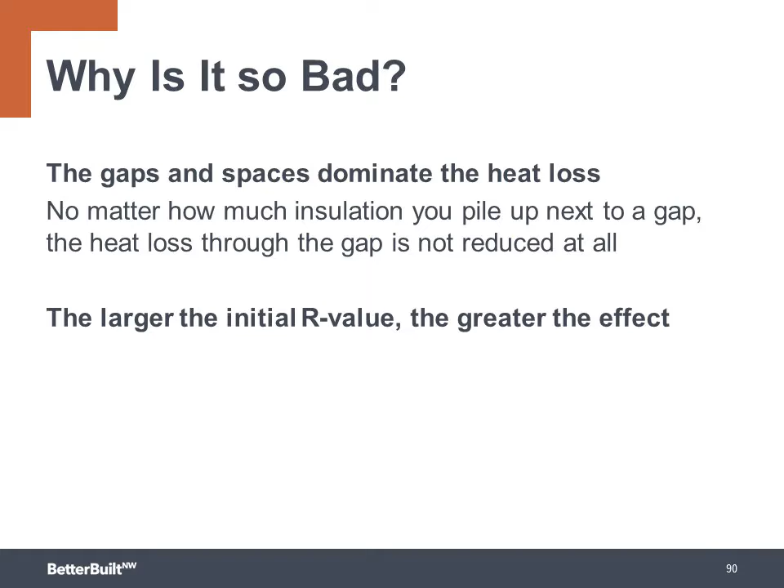So why are those imperfections in batt insulation so bad? Well, the gaps and spaces dominate the heat loss. No matter how much insulation you pile up next to a gap, the heat loss through the gap is not reduced at all. And the larger your initial R value is, the greater the effect it will have on lowering the R value of the building assembly.

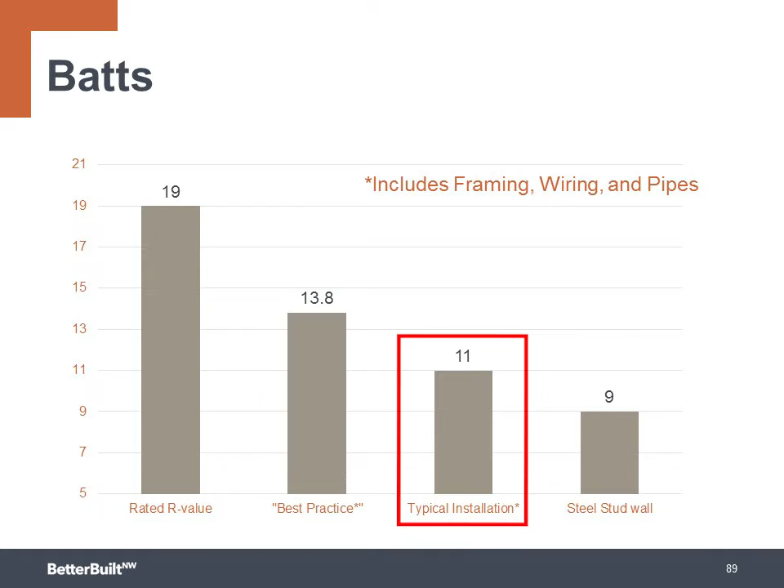In this chart, you can see the effect on walls insulated with batt insulation. The rated R value of the insulation is severely degraded when the batts are installed poorly. And unfortunately, this is the quality of a typical installation. So here's an example to show us how a small area can have a huge impact on the overall performance of a building assembly. You can crunch numbers through a formula called a weighted area average to see this.

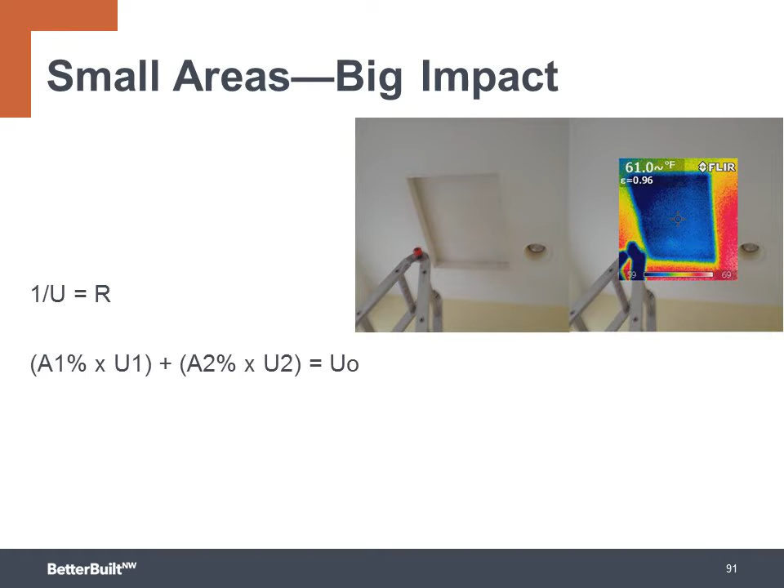So imagine we have a 1,000 square foot attic insulated to R38 and 5 square feet insulated only to R1. And this 5 square feet is the attic hatch because the batt sitting on the back of the attic hatch was tossed aside and not put back in place. How is the heat loss through that hatch affecting the overall R value of the entire R38 attic? After all, 99.5% of the attic is still insulated.

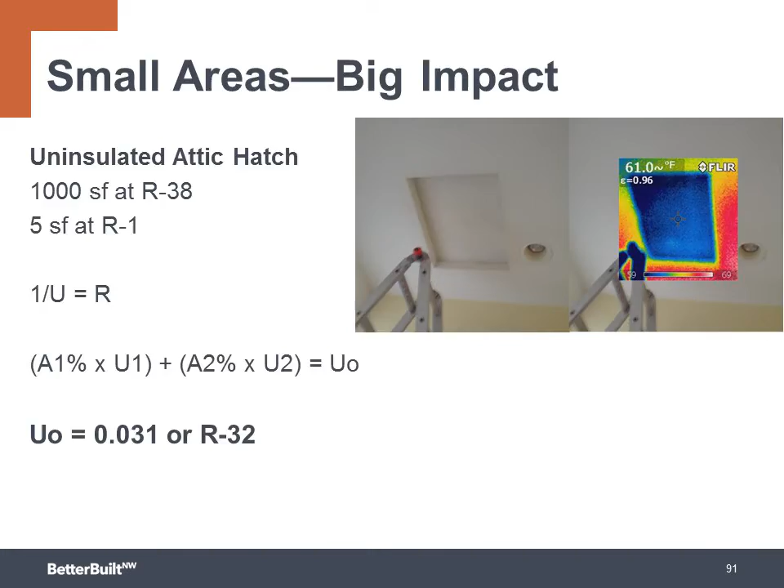When you run the numbers, it shows the attic is now performing as if it only had R32 insulation, just because someone forgot to put the batt back in place. So this illustrates that a wall with a lot of little gaps in the batt insulation could have its R value degraded severely. So if you are committed to using batt insulation, it's crucial that it is installed as perfectly as possible, and that means contact with all 6 sides of the stud bay.

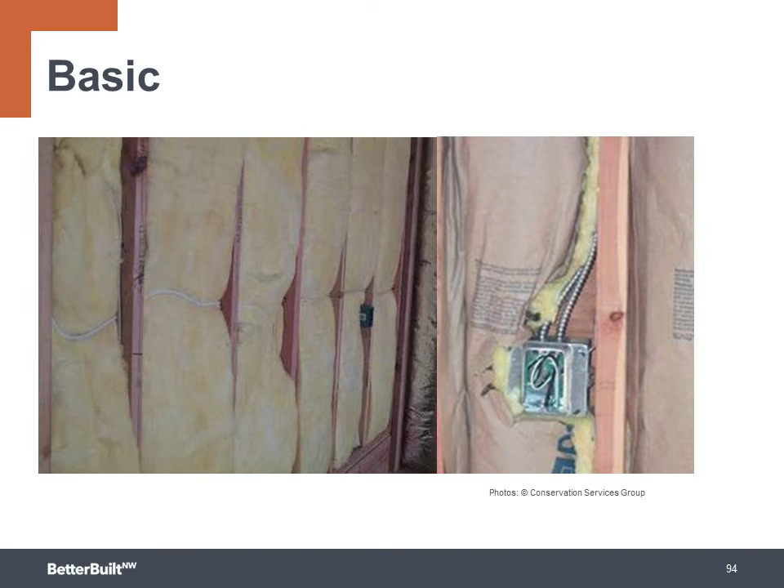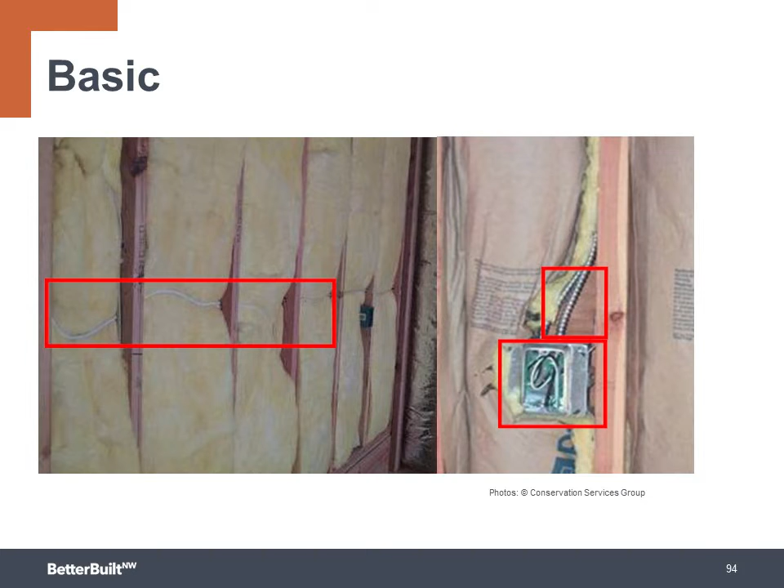It should fill the entire cavity without any gaps or voids, and without compression from being stuffed behind objects in the stud bay, which compresses the insulation and also degrades its R value. Unfortunately, it's often installed like this: not cut precisely around boxes, plumbing, or other objects, compressed behind wires, and gaps that provide line-of-sight pathways from the warm sheetrock to the cold exterior sheathing.

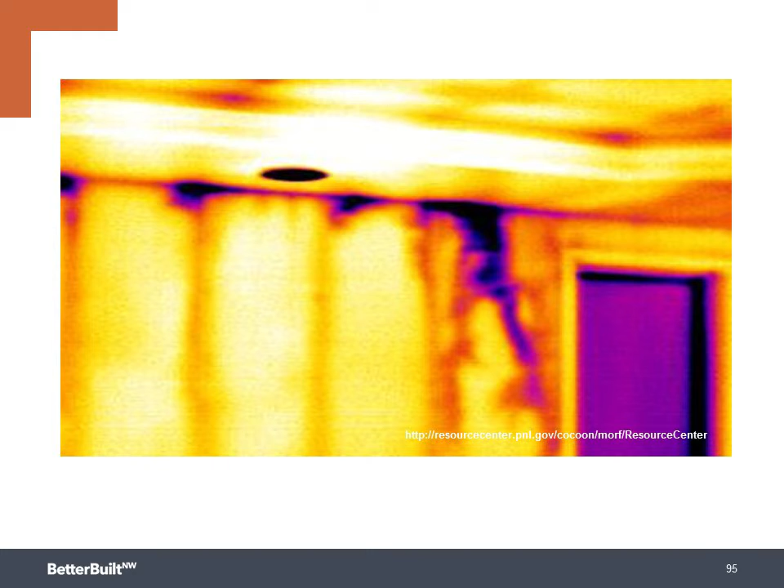Here's another IR photo that shows heat loss because a batt was compressed behind a wire and cold air is leaking through that void, creating a very cold area across the wall. So the easiest way to overcome these challenges is to move over to a different type of insulation. Blown-in wall insulation is an awesome choice. It prevents these voids by flowing around all the objects in the wall during installation and creates a high-quality assembly that performs to its rated R value.

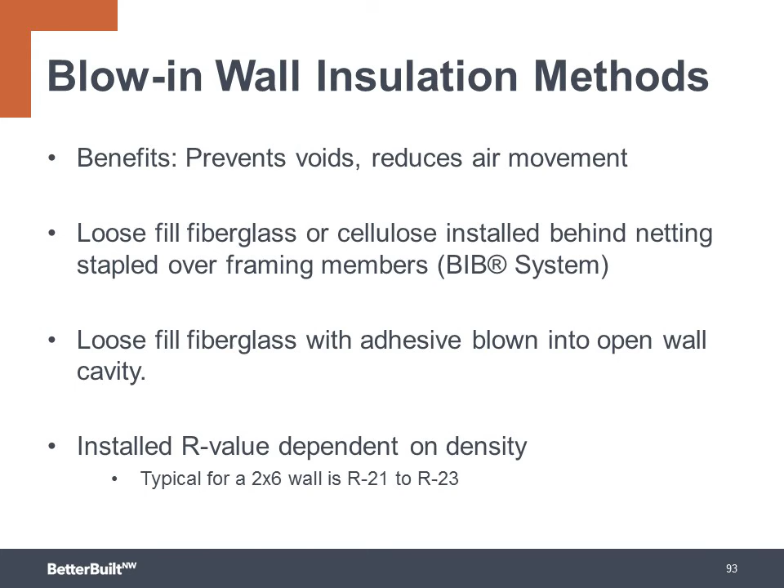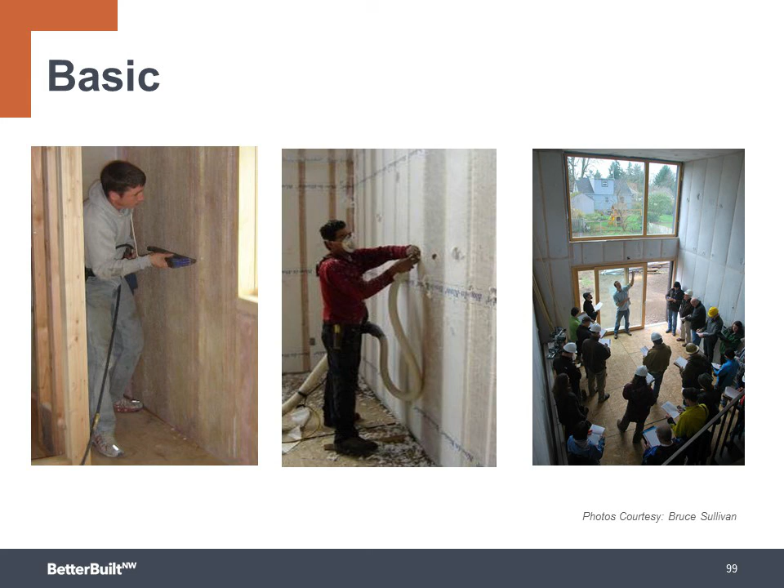It can also reduce air movement by filling the entire cavity so that the insulation is in contact with all 6 sides. Another benefit of blown-in insulation is that for many of the products, you end up with a higher R value. For example, with a 2x6 stud wall, you can end up with as high as an R23. Here are some photos of walls insulated with blown fiberglass behind a fabric netting that is stapled to the studs.